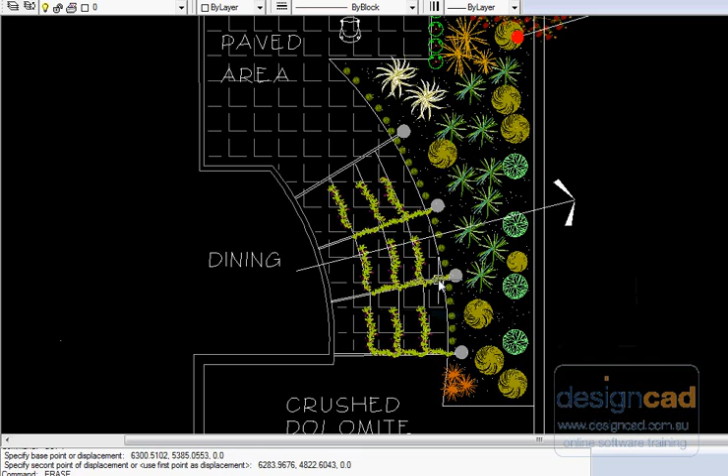It is useful to do a little calculation when you want to put an area of your design onto a page and have it at a particular scale. Just for the sake of argument, let's imagine that we wanted to detail this pergola. It's a wisteria growing up a stainless steel or a galvanized pergola with stainless steel wires, is the design running through here. We want to be able to see from a dining room through that area. There will be long windows in this zone in the house to be built. So this is the area we are particularly interested in explaining to the client the concept behind it.

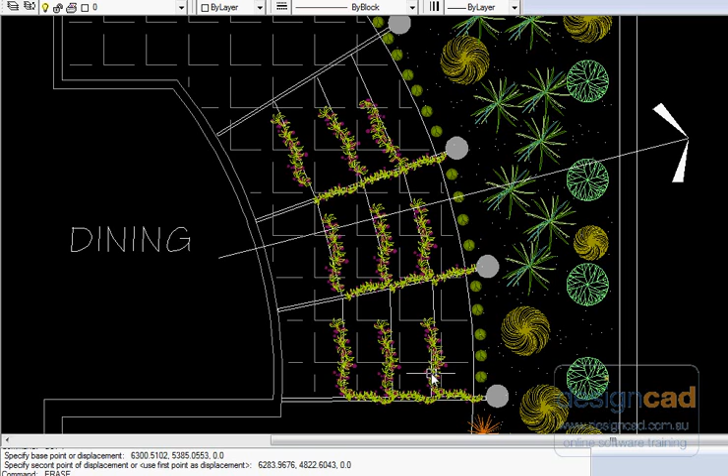If you use the distance command and measure from, say, one point of the dining room out here, you'll see it's about 7,700 millimeters. So we can do a small calculation. Let's imagine that we wanted to place this area onto an A3 sheet, which is 420. If we took 7,700 and divided it by 420, we'd get a value of about 17 or 17.5 or thereabouts. Now, as a scale, that wouldn't work. So if we tried a 1 to 20 when we go onto pages, we should be able to put this onto a sheet. So let's try it.

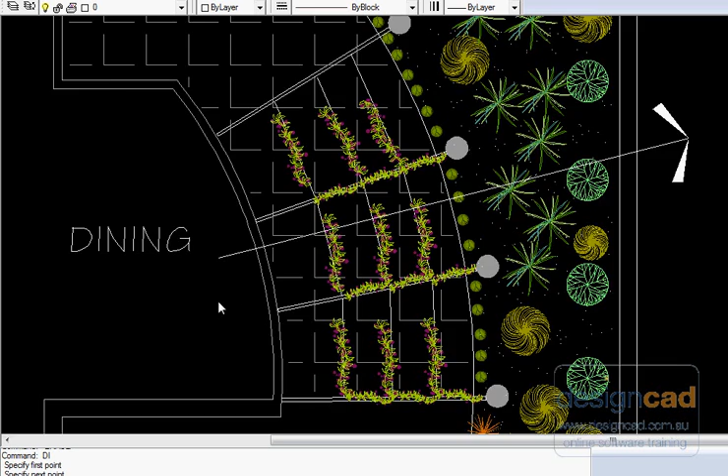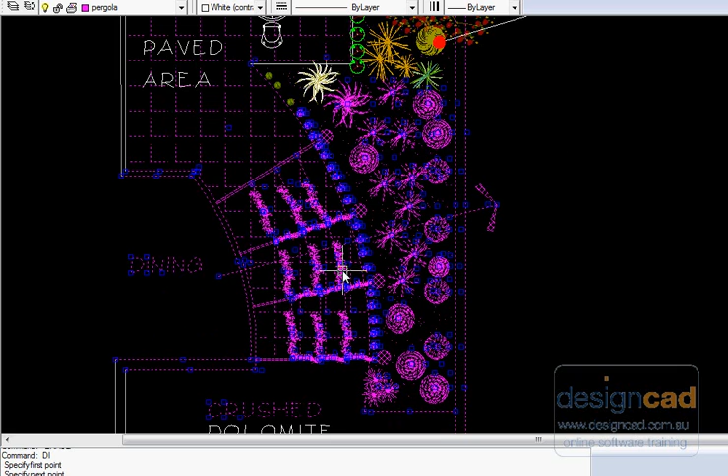A really useful thing to do when you're trying to transfer this area onto a sheet is just to take a crossing window and run through here like so. So I'm using a crossing window and taking the area of interest, and you notice the selection tool grabs areas outside of the screen. And I'll right click and create a block, and I'll call it pergola for want of a better name, and we'll go OK. And there's already one there. I'll say no, I don't want to redefine it. I'll go pergola 3 and say OK. One gets into a little trouble if you allow blocks to get redefined. It can work very well for you, but it can also confuse you. So when you're trialing, as I am here, just use different versions of the same name. So we have a block called pergola 3.

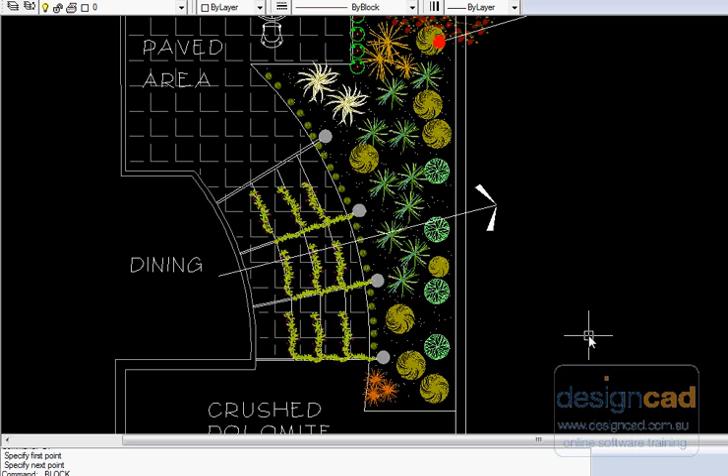Now what we want to do is call the page command, and we'll set up a new page. We'll call it pergola A3 to indicate that that's what we're doing. You notice I have caps lock on. Most of my drafting is done in uppercase for legibility. So we've got the name pergola A3. We won't write the scale at the moment, but we could edit it later on when we get it correct. So we'll make it the current view and we'll go OK. Now if we right click and go zoom extents, and zoom out a bit, we can pan across the drawing if we need to, but I'll make it quite small. So there's a small view of that A3 sheet.

Now we can use the insert command and insert the block pergola 3 we're after, and we'll OK it. I'll just move that into the field of view. We could now type the value or specify on screen. So I'm going to type the value. 0.1 is a 1 to 10 scale, so 0.05 is going to be a 1 to 20 scale, which is what we're after. Rotation angle we won't specify, it'll be 0, but our insertion point we'll be able to specify. So we'll go OK, and in comes our already scaled block, and you can see I can move it here and put it roughly on the sheet.

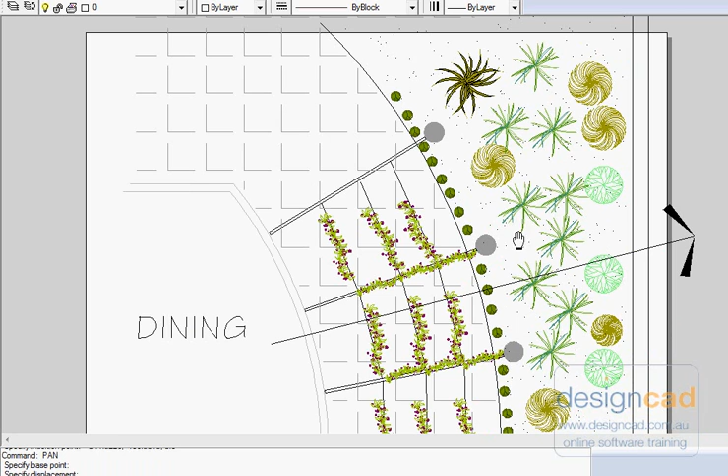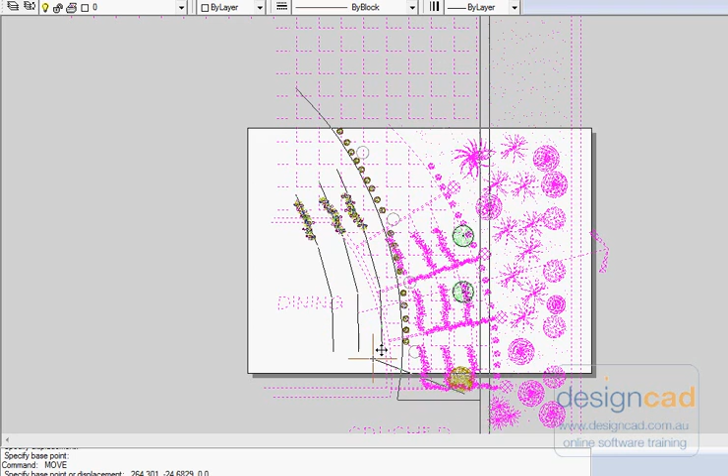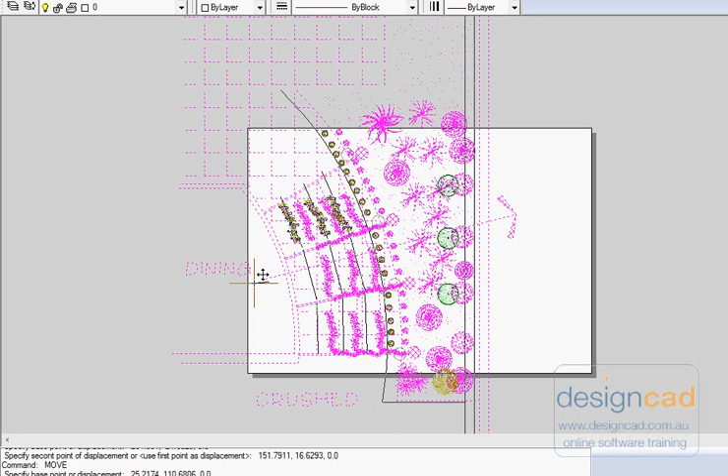I don't get too fussy at this point, and now I can zoom extents, and I'll just pan across so you can see the whole sheet. Now you can see the sheet. I'll shrink it a little, and our positioning is not quite right, but it's a block, it's one entity, so we can simply select it and move it into position. So we'll juggle things a little bit, as long as we see the dining room and the line of sight. I've got the dining area there. I haven't got the text dining. I'll drop the text on; I can add that a little later. So I'm going to move it again a tad to get the word dining off the screen. Hopefully that's done it. And now I can see the pergola area and the wall through here.

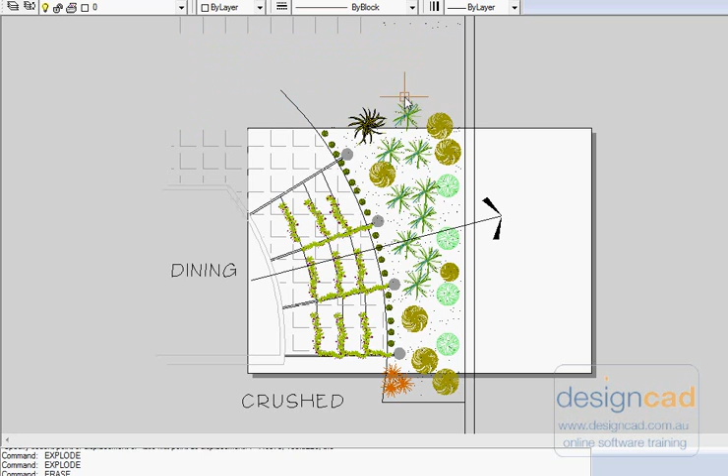Now it's time to do some trimming, and that's precisely 1 to 20. So I select the whole block, I explode it. Both lots of hatching I have to explode twice. And now I'll leave the wall on there, but I can remove everything that is extraneous. So we'll take that lot out to start with. That cleans things up a little. This plant we don't need, that one we don't need, that one we don't need. We can come in here with a crossing window, whoops, and get rid of that, but I better undo because I do want the wall of the house to show. I can leave those there even though they hang off, and I'll zoom out even a little more, even though they're extraneous.

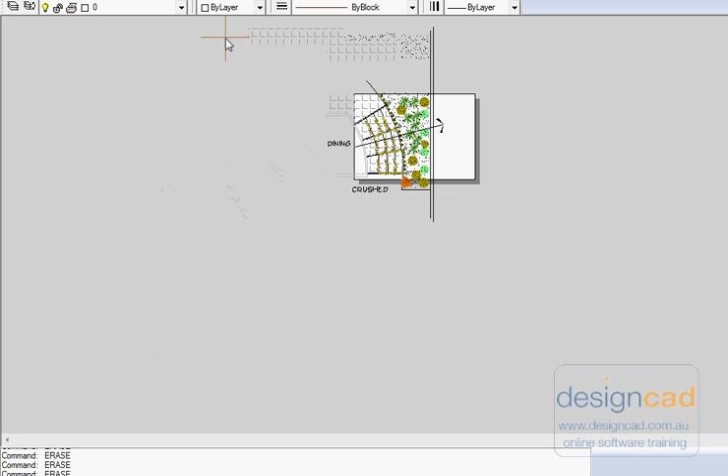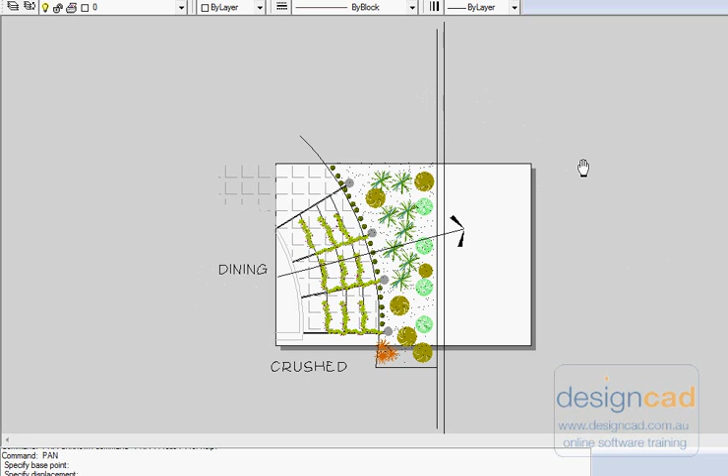I'll delete that lot and zoom extents. Even though they're outside of the field of view, here I go again, I need to pan for your benefit, and pan, and move from there to say there. Now we can see that wall. I want to leave it there deliberately at that stage, but I digress.

We have on this sheet of paper a 1 to 20 view of the design. I'll just clean up a little there, and we could trim off other pieces if we want. But just to show you how it's going to look, and we've got to put our logo in here, and we might even want to put a photograph of how we expect this view to be in that position.

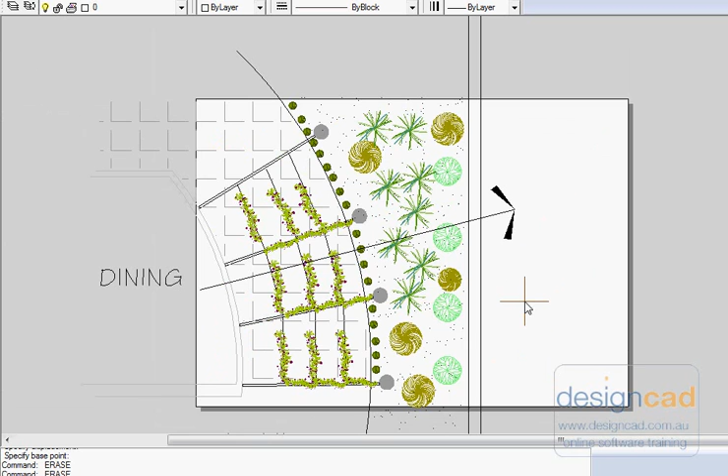One thing to be very careful about is when you bring in a block, do check, if I say specify on screen or not, check the value in this X box here. I've decided to bring in a 1 to 50 scale just to try things out, and I'd forgotten to, and had left this set at 0.05 for our earlier one. Now I want 0.02 as my scale, so I'm not going to specify it on screen. I'm going to nominate the scale to bring in this new block.

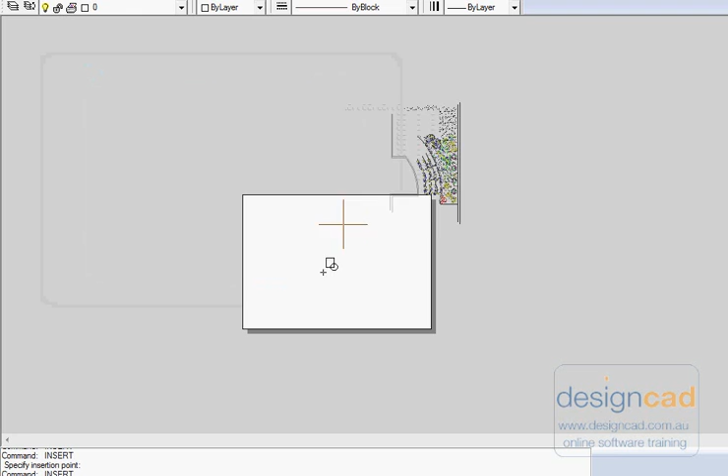So I'll go OK, and in it comes. So this is coming in at 1 to 50, and we can position it on the paper. And in it goes. And you can see that I'm going to need to do less cleaning up, I think, than I did before, and that leaves me lots of space to dress the drawing up. The disadvantage, of course, is that what you show the client is a little smaller.

Unfortunately, in Australia, we're allowed to use 1 to 10, 1 to 20, and then jump to 1 to 50. In this particular instance, the 1 to 20 is just a tad big, and the 1 to 50 is just a tad small. Of course, if you don't have to write the scale down in here, you can just scale this dynamically and make it fit. So I could do that, but I would lose the discussion train of what we've been on about. So now we're in a position to dress this up with a logo and some more information.

We will select the print command, and up pops the print box. We'll say print window, and we'll pick a box around the whole page like so, and then we'll preview it. But notice that I've typed in here 1 equals 1. If you leave scale to fit, which is the setting most of us use, you notice it says 1 to 1.0232, so not quite there. So take that off and make it exactly 1.

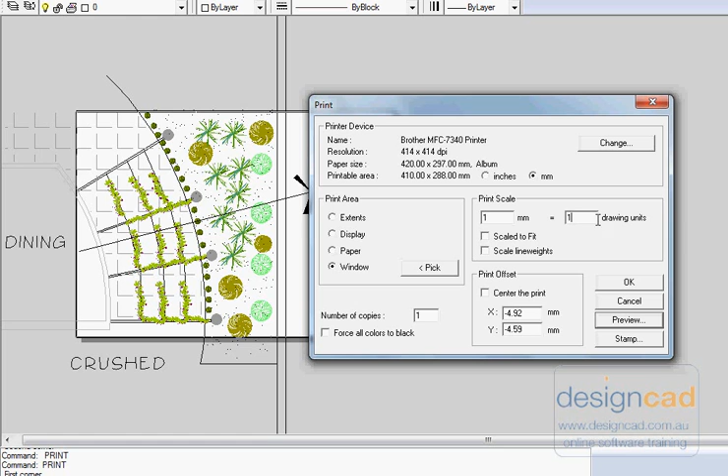We've scaled this 1 to 20. That scaling has been done. So now we want to print the sheet out 1 equals 1, because the scaling factor has been applied. And we'll center the print, and if we preview it, we'll get a view of what the sheet looks like. So we're able to present to the client a really detailed view of the design for the pergola area.

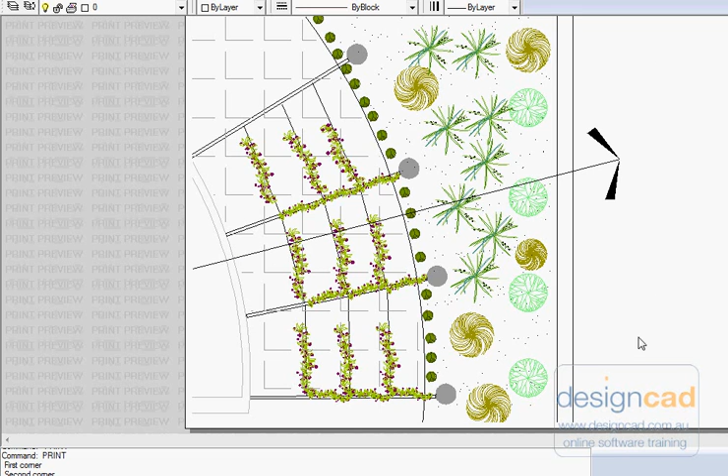We can add some text saying view from the dining area, and if we get some more space on there by scaling it down, we might move to 1 to 50 and then put some other information on here. But I'm sure you get my drift. I'll hit escape and cancel and go back here. We are working on presenting an accurately scaled view of part of that design, and we're using the Pages feature to do that.

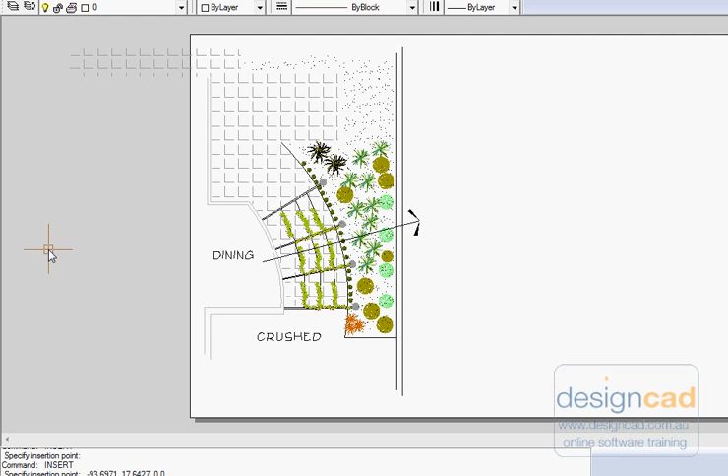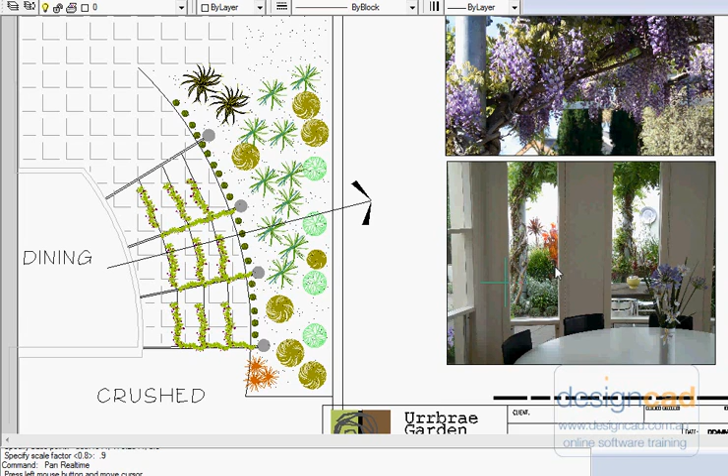Well, finally, here's the finished presentation. The design in GardenCAD on the left here, and a couple of images taken after the garden had been constructed. A view from the dining room out into the new garden, the wisteria growing up here, has been taken 3 years after the implementation of the design, so growth has been quite rapid.